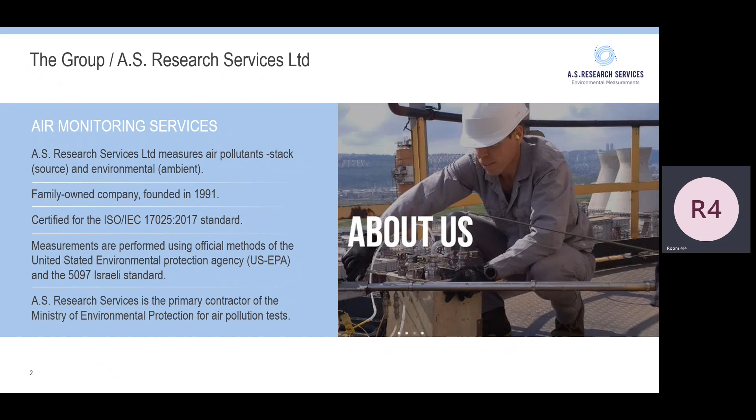And actually, we were the first one. We also run an analytical laboratory from GC mass spec to HPLC and ICPs, and we've got some unique features that you cannot find maybe even in the United States, like we are accredited for aldehydes, silicas, and all those.

But what we're going to talk about is a company named Atmosfir Optics. In 2009, we were the first ones to go into a refinery, and we started measuring. We did one week of measurement, and it took us around one month with two PhDs to analyze the data.

It's good, but you cannot do a business that way. There are not too many PhDs who know how to do the analysis. So then we wrote the method to automate the analysis.

So we are not a manufacturer of equipment. We work with different manufacturers' equipment, some of them here, some in Germany, some all over the world. So we are agnostic. We are actually a data and software research integration company. We provide advanced air monitoring worldwide based on a SaaS business model.

Actually, I'm quite lucky. Some of my scientists actually wrote the method and invented the instrumentation back in the 90s. If you heard the name Robert Kagann, he's still working with us.

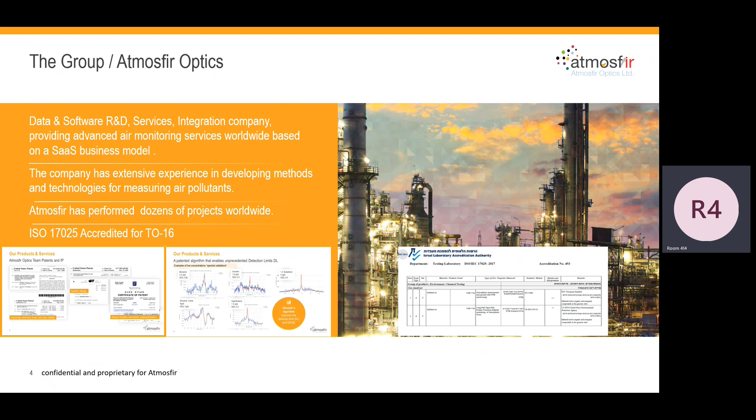So we heard a little bit about Rule 1180 that says you need to integrate FTIR, UV DOAS, but we can also integrate tunable diode lasers for other reasons, point monitors that start from PIDs, electrochemical cells, and up to GC mass spec. We run the raw data through our software, enhance the quality assurance, and give you better, easier to understand results.

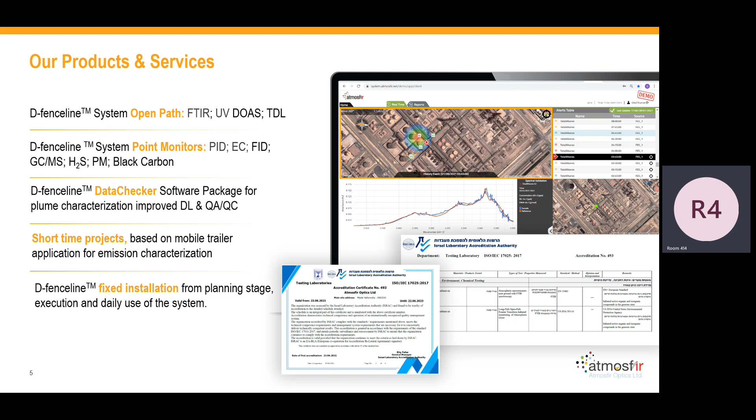So I'm not ChatGPT, so I will not give you the very good answer for why we need the Fenceline monitoring, but in the end of my presentation, I will use it.

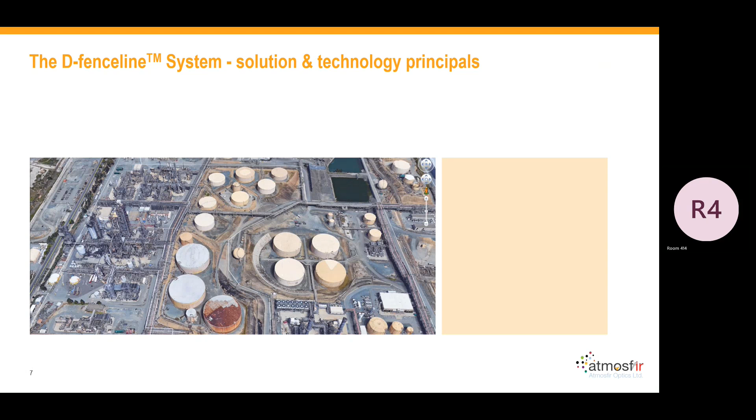When we ask people where the emission coming from the petrochemical industry, if you were in the 70s you would say out of the chimneys because you saw a lot of chimneys with black smoke. But today we know actually most of the emissions go out of tanks, farm, product terminal, equipment, human errors, cooling tower, evaporation pool, heat exchangers. And what's unique about all of those is that we are not measuring them 24/7. So if you got a problem, we have to wait if it's in the LDAR program, and most of them are not.

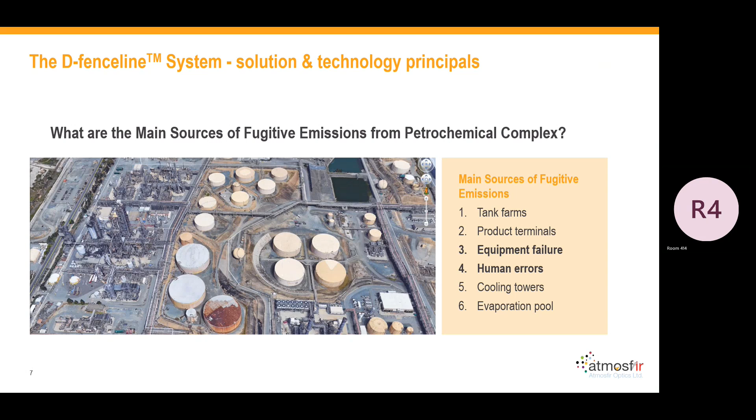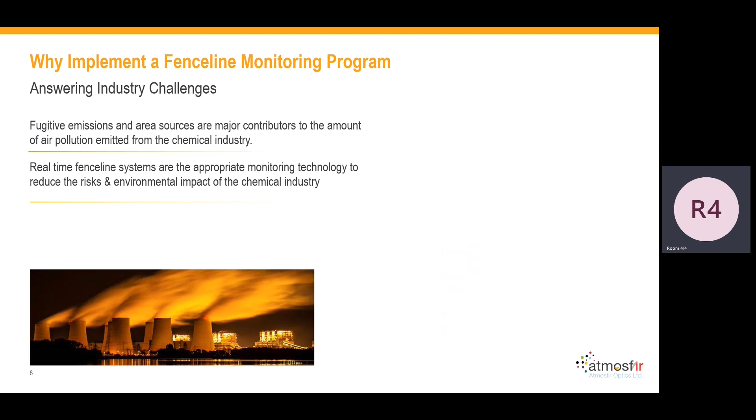In other words, fugitive emission area sources are the major contributor to the amount of air pollution emitted from the chemical industry. Real-time Fenceline systems are the appropriate monitoring technology to reduce the risk to the environment from the impact of the chemical industry.

Everybody heard about the Philadelphia refinery that exploded. If you look at the data of the passive sorbent tube that was there before the explosion, there were high concentrations of benzene. Now imagine that we have an analyzer that alerts not just on benzene, but on total alkane, which is usually 100 times more than benzene, and it will alert you to high concentration coming from that area. So you fix the problem, and maybe you can eliminate the risk of explosion.

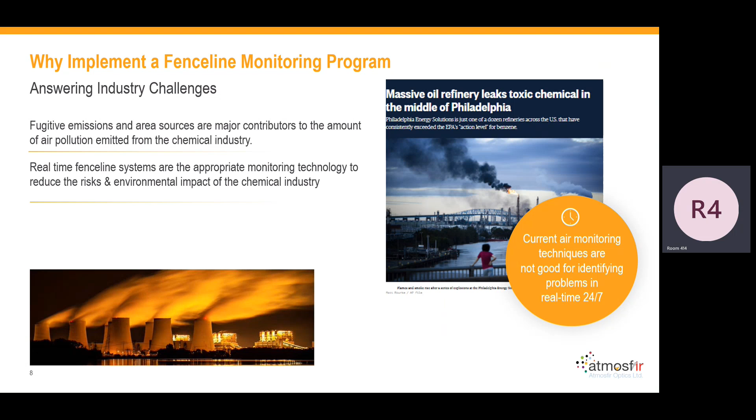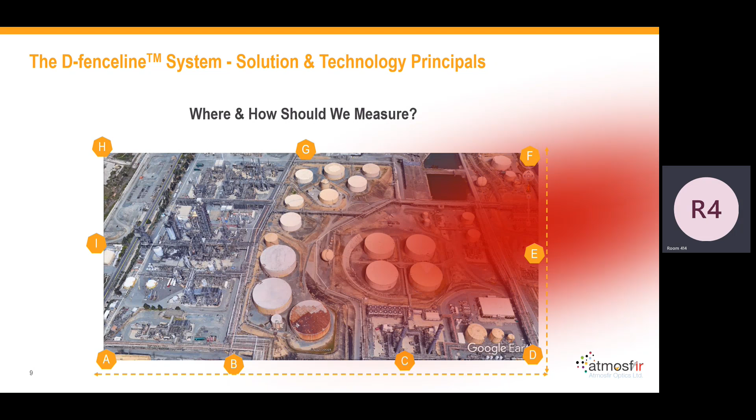What happens? The air pollution moves with the wind. So if there is emission going out, we will not sense anything in point H, I, A, B, or G. And if we sense it on point E, it will not represent our emission because it gives us higher results.

The actual result that will represent our emission, the average, is good for the industry, maybe more representative, because it will dilute the emission as a line and give it more representativeness. So the concentration here can be 1,000 ppb, but on average it could be 100 ppb. But the 100 ppb is more representative than the 1,000 because 1,000 is just one point.

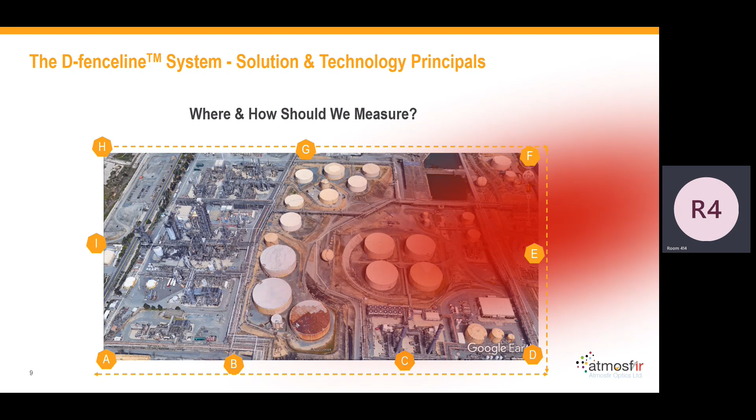Open path measurement along the Fenceline dramatically improves the ability to represent emission when measurements are near the source.

If we are measuring in chimneys, we've got our method, we've got our CEMS. If we go to measuring the city, we've got our ambient air monitors. But if you want to measure on the fence line, the most appropriate technology, if it exists, is to do it with open path.

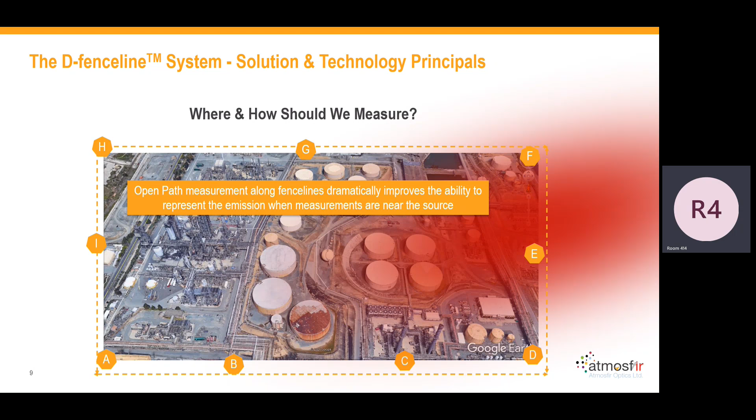Because equipment failure and human errors cannot be predicted in time or space, continuous 24/7 spatial monitoring system is required. We don't know where it's going to come, but we need to know when it's going to come.

If you want to measure our annual emission, if we want to reduce our annual emission, the way is to find the problem faster and fix it.

As a rule of thumb, if we monitor our facility without adding extra money, we find the problem at day one that it starts, we can save 99 days until the LDAR comes and finds it.

So every day equals 1% reduction of emission. We don't build huge scrubbers, we don't build huge things. We just prioritize our LDAR job based on our fence line monitoring.

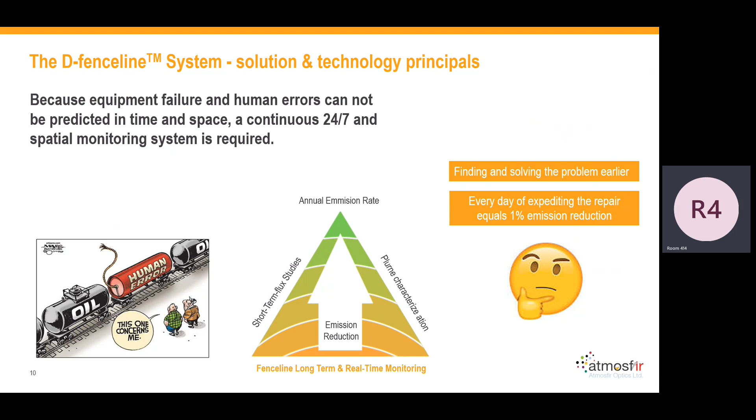So if you have a fence line monitoring system, try to correlate it with your LDAR project, and then you will have another benefit.

So the first program that started dealing with fugitive emission was the LDAR program. And that says that you need to go and sniff every piece of equipment that you can reach, and do it once a year, once a quarter, depending on the regulatory requirements, and fix it within 2 weeks' time.

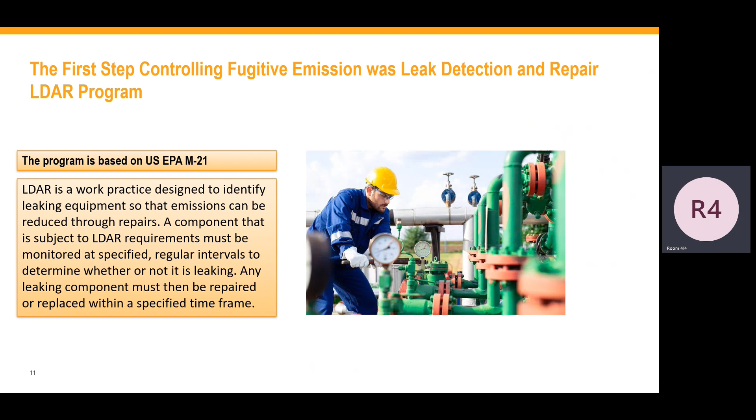First, they start doing it with soap, and then they start doing it with sniffers, and now everybody is talking about OGI cameras or point monitoring. What I'm talking about is a holistic approach where you have fence line monitoring together with real-time point monitors in your facility. That's the way to find the problem.

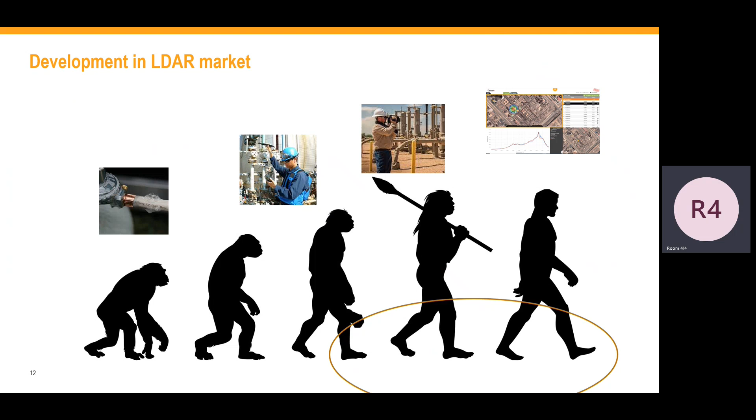In 2015, the federal government accepted the benzene rule that says every refinery must measure benzene on the fence line. I got a lot to say about this rule, if it really protects the public or not. I will let the EIP, Environmental Integrity Project, say what they have to say about it.

But the results are like that: in 2020, 13 refineries were exceeding the benzene rule, and 7 out of those 13 refineries did it 2 years in a row, meaning 2019 and 2020 they were still exceeding. Why didn't they fix the problem?

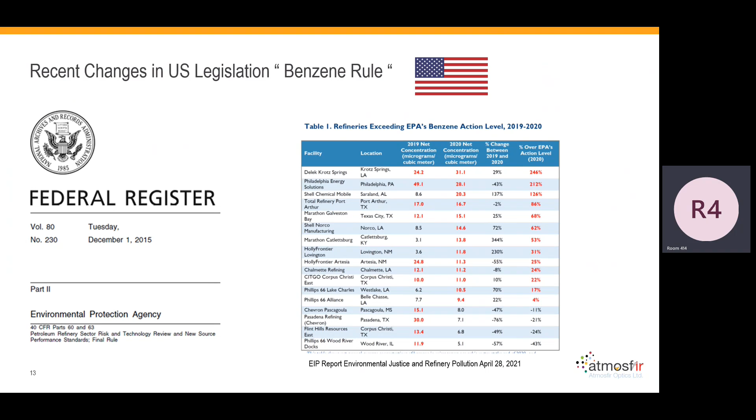So talking about delta, it's not good for the public. We want our technology to definitely be better than that.

Short-term benzene concentration may threaten public health, and they are true. If you do a 2 week average with the passive sorbent tube, you can have peaks of 10 ppm, and it won't be noticed because you average for 2 weeks. This can be problematic also for the refinery and for the public, and you must know it before.

And people start asking, why just benzene? Benzene is maybe less than 1% of what's going out of the refinery. It's not even the most dangerous compound in the refinery. So why did everybody focus on benzene? Everybody was speaking about benzene, but there are other compounds like formaldehyde and acrolein that are in the same danger category.

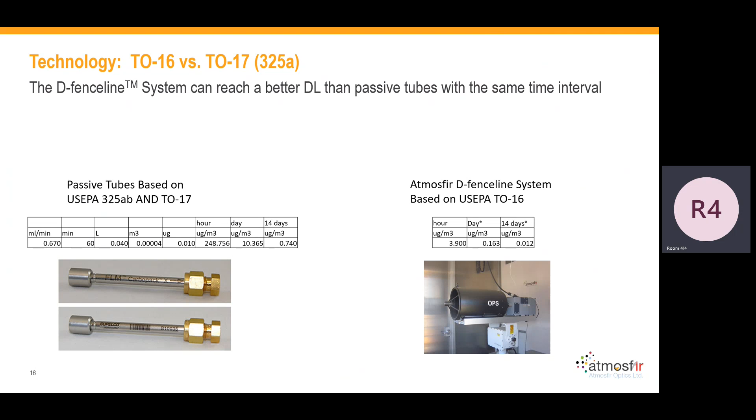I would recommend doing them both. Not because I'm doing the passive sorbent tube, but because it's hard for you to miss the concentration or miss the pressure. So a little comparison between point measurement and line measurement.

Probability to detect the pollutant: if you are using point measurement, the pollution must go directly to your point, so it's low. If you are using line measurement, it's high.

Expected concentration upon measurement: with point measurement it would usually be much higher than the line, because the line will dilute it. As a representative of the factory emissions, point is poor and line is better. And sampling interferences, you get a lot of interferences, but if you know how to run your instrumentation, you can see all the interferences and subtract them.

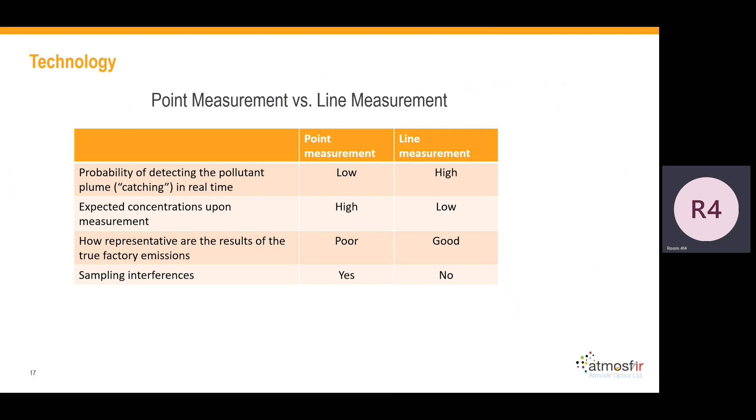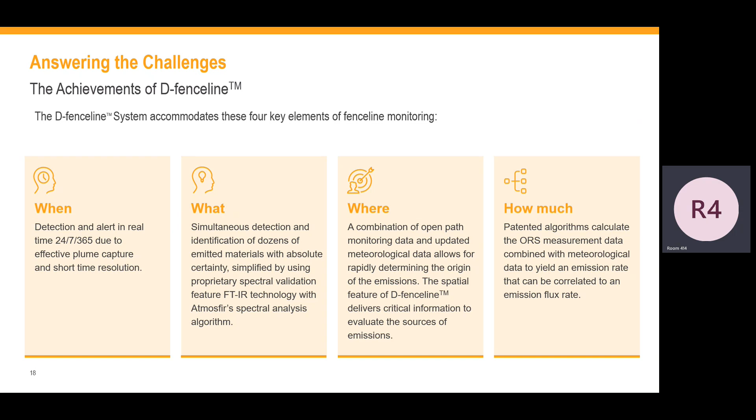But when you do a point measurement, we created what we call the D-fenceline system that monitors 24/7, telling you when emission starts, what the emission is, not just benzene but all the compounds, and also on a real-time basis where it's coming from, and also quantification of how much. It's your need. Let me show you a little bit how it looks.

So here we've got an open path FTIR. It could also be UV DOAS. We shine a beam of infrared light if it's FTIR. If it's UV DOAS, we shine a beam of UV into a retroreflector. The energy bends back. In the way it reacts with the molecule, each molecule absorbs light in a different region, and then we use the Beer-Lambert law to give concentration.

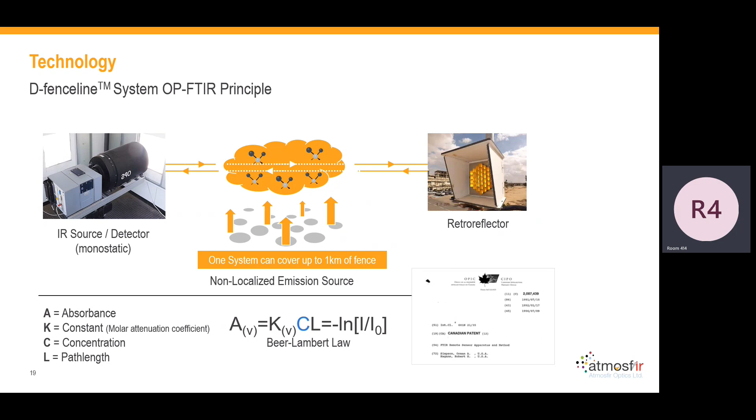And this configuration is called monostatic configuration, again a patent of Robert.

Problems start because we can measure all the compounds with one instrument. Because we can do it, if you don't do it correctly, then you will have a lot of false positives and false negatives. If you don't take all the interferences into account, you'll have a lot of false positives and false negatives. And if you don't know how to do the analysis correctly, you'll have that problem. So you must know how to do it.

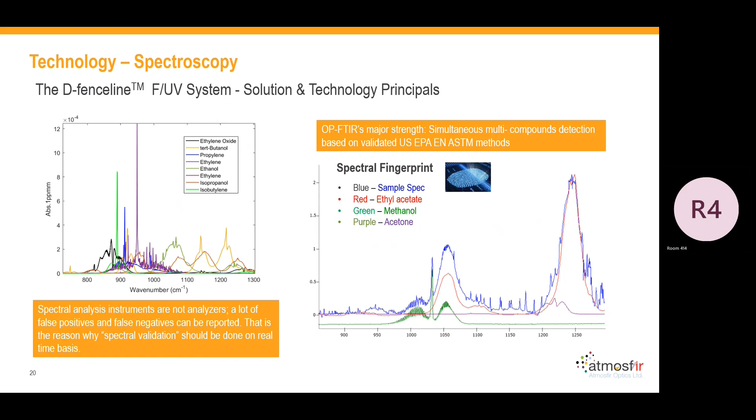As far as I know, for every number that we report, our client can click on the number and it will open the spectral validation. Red is the reference spectrum from NIST, blue is what we're measuring in the field, and now you can be positive that what we reported is true.

Sometimes people claim that we don't show what we do. So actually, we're the only one that gives our client the ground truth against NIST.

And this is actually, if we compare something to NIST, it's called calibration. So each measurement is a calibration. You don't need to calibrate it, because each time we compare our spectrum against this reference spectrum. So if you compare something against this, that's called calibration, so you don't need to calibrate it. You can do a verification, but not calibration.

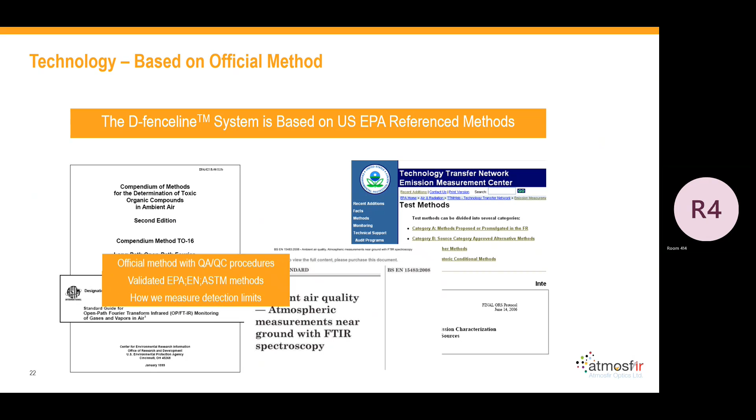I love the FTIR because you've got written methods. You've got US EPA Method TO-16 that allows you to measure any gases in the atmosphere using this method. You've got ASTM, and EN, you've got QA/QC procedures.

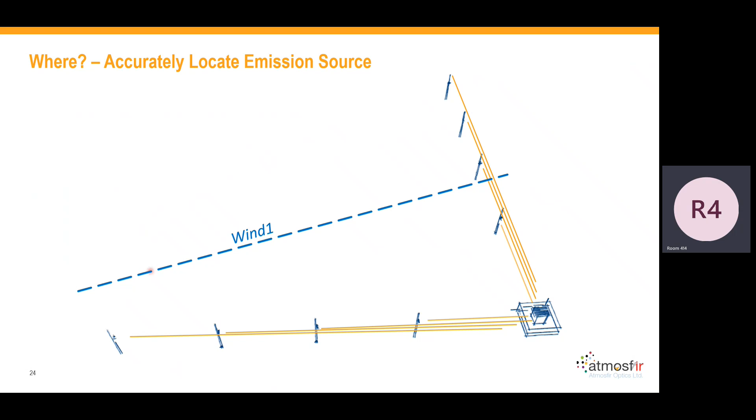How we do the source location, same as the previous presentation, but we do it on a real-time basis. We correlate with the wind, find high concentration on that segment of the fence line. As the wind changes a little bit, we find high concentration on a different segment. That gives you the origin.

So it's not that easy because you've got multiple sources. You need to know how to separate them, and it won't be so accurate the first time. But imagine we've got thousands of those points, and now we can run a statistical algorithm to see where the origin is.

For sure, we can tell you if it's coming from your facility, from the Dominguez Channel, or from a sulfur plant nearby, and we can do it on a real-time basis.

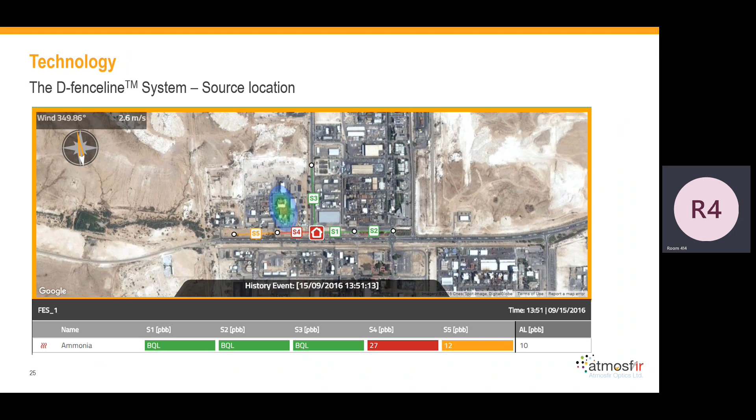And because we want it to be easy to understand and digest, and we know the operators are not PhDs and we want them to run it, we have this screen for our client, not for the public. The brighter the color, the higher the possibility that the leak is coming from that facility. And now you can send your other team with the sniffer, the OGI camera, the ultrasonic, whatever you want, and they will fix it.

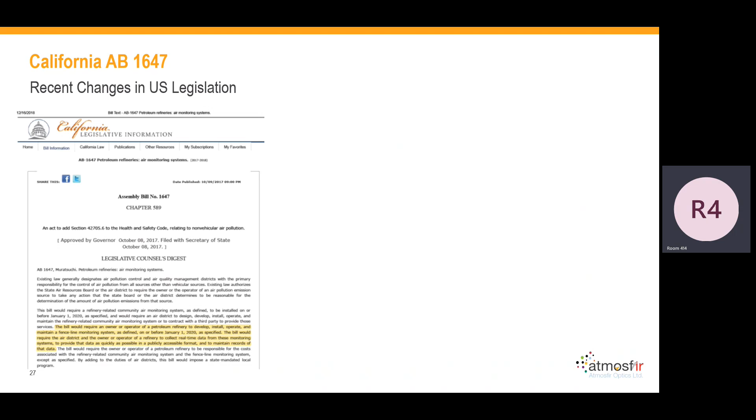So California in 2017 wrote Assembly Bill 1647, and it says every refinery must measure the pollutants on the fence line and report to the public on a real-time basis, no later than 10 minutes. Every refinery — that was the rule.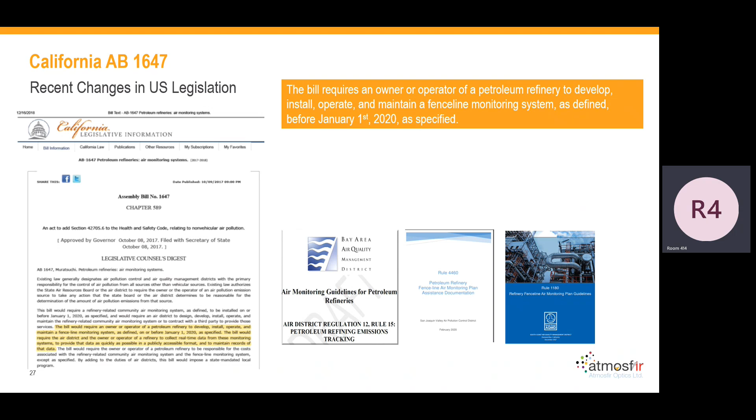They decided that small refineries don't need to measure. What's a small refinery? They decided 40,000 barrels per day. Why? That's what they decided. Each refinery and each set of guidelines gives a different list of compounds that they want to measure, and different time resolution, different quality assurance — a lot of fun.

All of a sudden, from a $0 market, and I'm very modest, we created a market of about $50 million with all those installations, with recurring revenue of around $15 million. Just by the rule, the industry did a very good job, no complaints, everybody did it on time, and if there is regulation, everybody obeys.

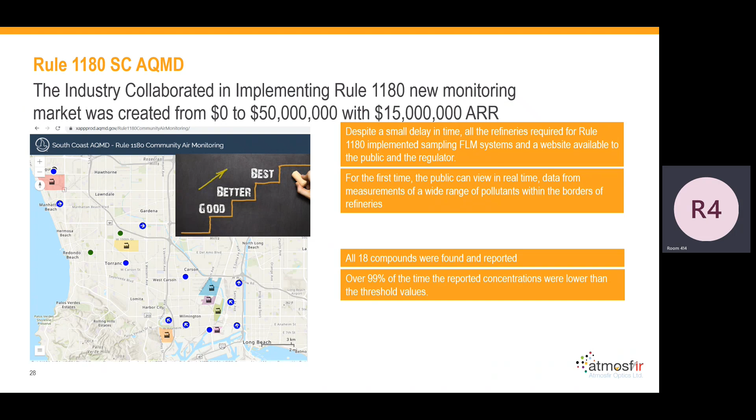That really did it. All the compounds were found, and what we found out in California, and I can tell you this is not the situation if you go to Canada, I'm not sure if it's the situation here in Texas, but more than 99% of the time, as you saw, everything is below the threshold. Sometimes we've got exceedances. Most of the time it's not related to the refinery. Sometimes it's related and they fix it.

But we report millions of data points to the public. How do we know that it's true or not? I cannot put our PhDs, or not spectrum PhD, to analyze each one of the data. We must have software that will do it automatically. Otherwise, we will report bullshit to the public. That's why.

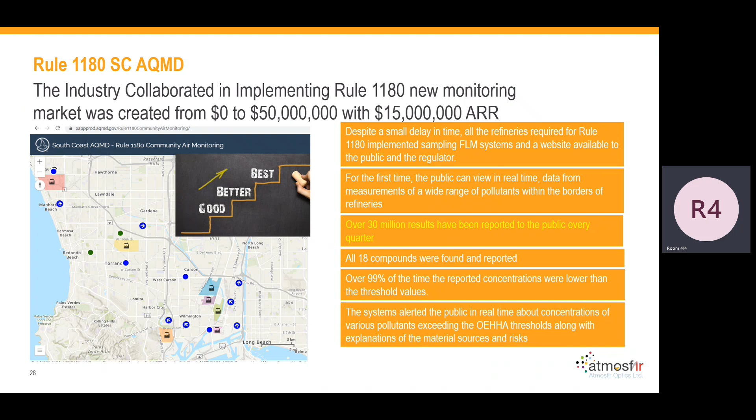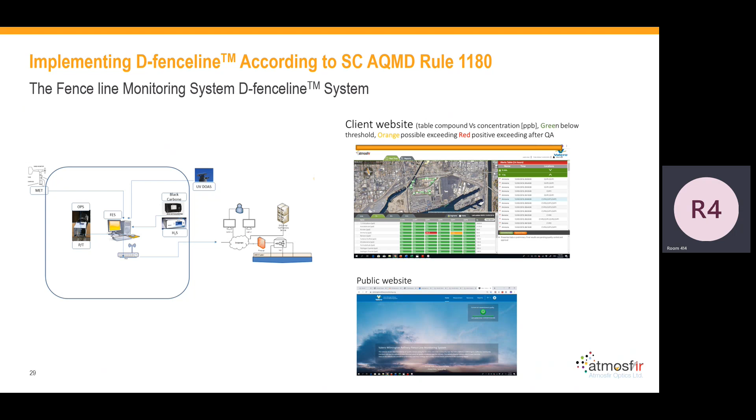So for our client, we've got a website for yourself that has all the bells and whistles: source location, spectral validation, a lot of other features. And for the public, you got something that says green, it's everything, it's okay. And how this installation looks like. Maybe if you will have time later on, I will show you if you got that question.

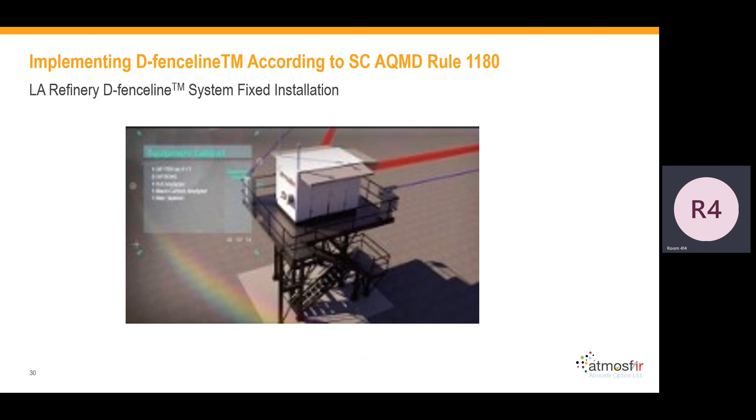So this is the list of compounds, and this is our detection limit. These are the thresholds by the Environmental Protection Agency of California or something like that. And this is the MDL from all the refineries from the quarterly reports, for the South Coast I think, or from all of them. And so you see quite a difference. Let's say 1,3-butadiene, we report around 0.3 ppb, and one can report 9 ppb.

But if you go to acrolein, then it's very dangerous - a rarely found compound because they don't manufacture it, it's a side product maybe, and the threshold is 1.1. So we can measure it at 0.3, but some of the other refineries claim that the detection limit is 30 ppb. The threshold is 1.1, and the detection limit is 30 ppb. Unrealistic, and it's gone like that for at least 3 years now.

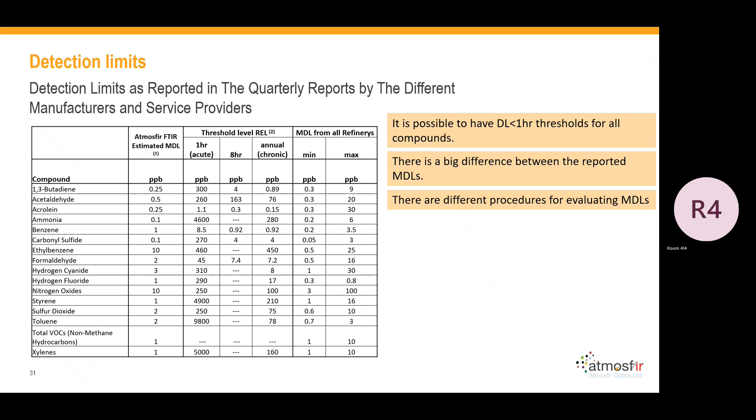But what we can see in this table is that the compound can be measured below the threshold. So if it can be done, everybody should do it. There's a big difference between the reported MDL. Each one of us do it in a slightly different way. Some of them do it empirically, some do it by measurement, some of them stop the measurement and do it once a quarter, some of them measure routinely. There's no distinguished rule how to do it.

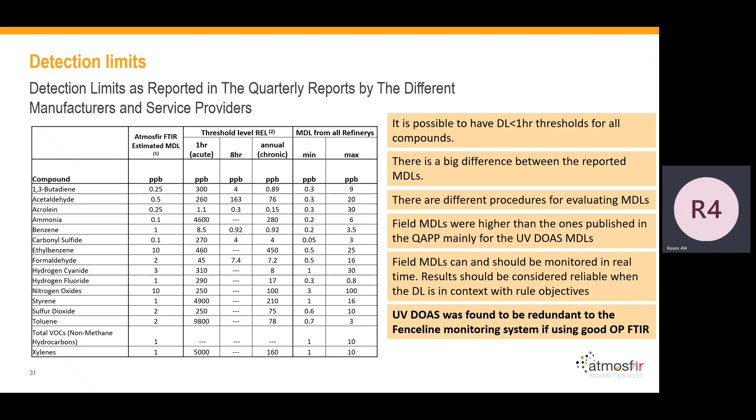Actually, field MDLs, and also our field MDLs, were higher than what we thought in the beginning. And what we found out in our installation is that UV DOAS didn't give a better detection limit for benzene. Yeah, the signal is much stronger, but the noise is also. This is from our installation, and we used for that installation Swedish UV DOAS, called OPSIS, accredited, got TÜV approval, all the approval, whatever. And if you get the report, they should be at 0.2 ppb detection limit, but this is the actual measurement that we found.

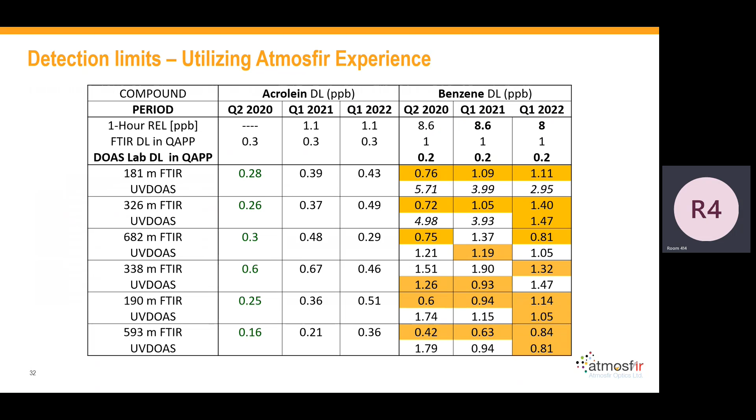There are times it's 2, sometimes 5 ppb, and they got TÜV approval of 0.2. So if I took the instrument and put it in the laboratory on an optical bench, it will give me 0.2. But out in the field, when you've got oxygen and ozone, then it started to change. And if you look at all over the data, with all the passes, you can definitely see that most of the time FTIR got better results, real-time results. So you don't need to have a UV DOAS, an FTIR, or a good FTIR - I will not tell where it is, but there's a lot of others.

So we're talking about acrolein. If you get to read the quarterly report of that refinery, it says that his detection limit is 4. If you go into his website, then you get this, 0.6. Same refinery reports on a real-time basis, an order of magnitude different than what he reported in the quarterly reports, and there's a lot of problems going on.

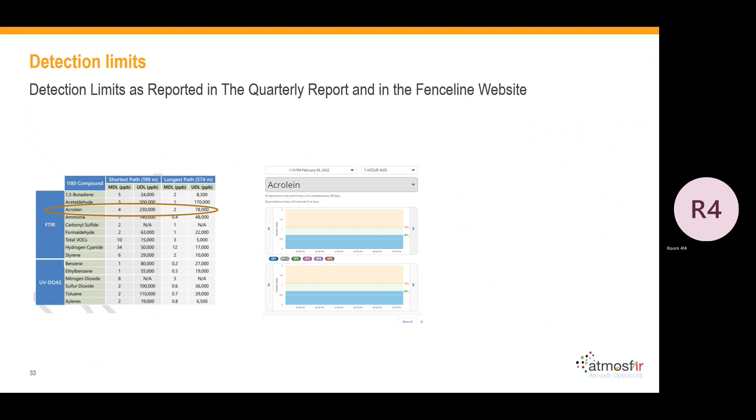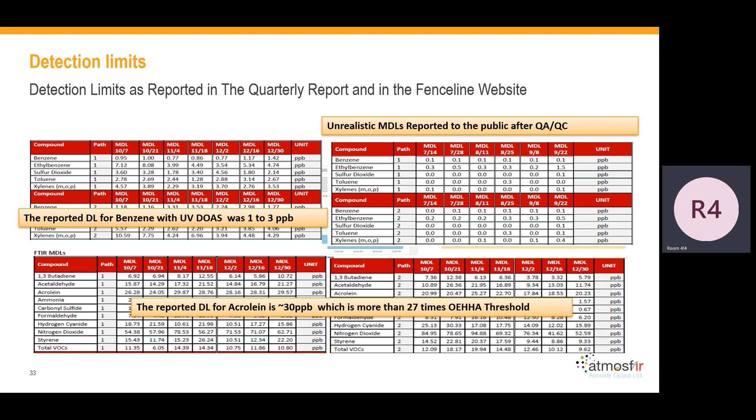Then different site, then acrolein, 30 ppb benzene with UV DOAS 1.5, and sometimes they give results of 0 detection limit. A lot of problems with the quality assurance.

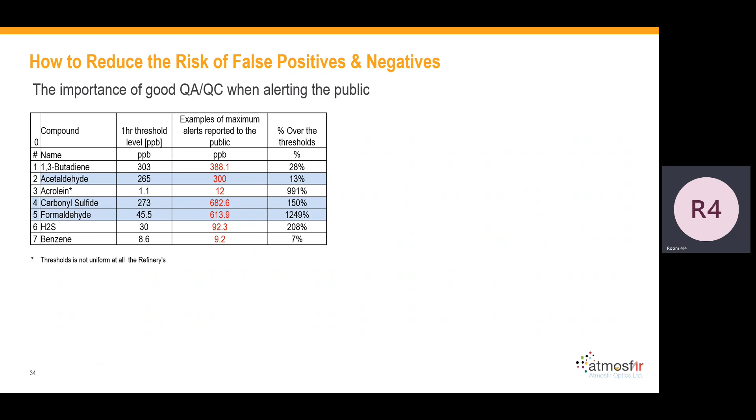In the beginning, there were a lot of alerts, not with Spectrum, but other refineries gave a lot of alerts, and they were false positives. For example, concentrations of 300 ppb of acetaldehyde or 600 ppb of formaldehyde - you never see those concentrations on planet Earth, not in China, not in LA in the 50s. So they didn't do the analysis correctly, and the quality assurance was bad because they don't have spectral validation, and they reported that to the public.

Actually, 3 years later, they're still on the quarterly report with those incorrect concentrations. For sure, it's bad for the company, it's a risk of litigation, and you find problems that do not exist.

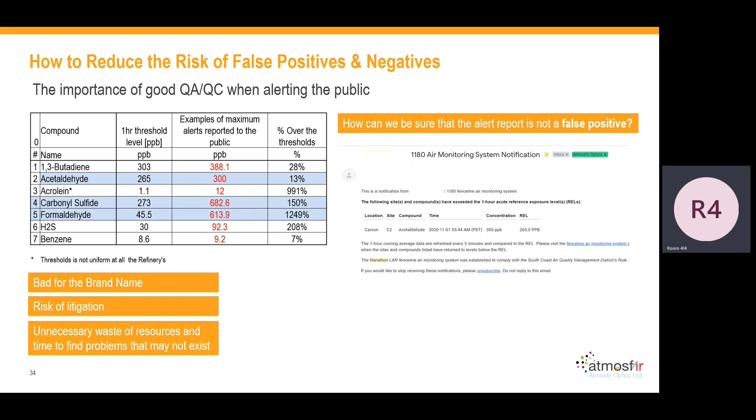Buying the instrument itself is not enough. You must have a person or software that knows how to do the analysis correctly. And as I said, each number that we report gives spectral validation.

We talk about the Dominguez Channel. In the beginning, there was no Dominguez Channel data, but the first day we started operation, we had the threshold exceeding for H2S. I looked at the wind and it was coming from the north, so I could tell my client that it's not his refinery.

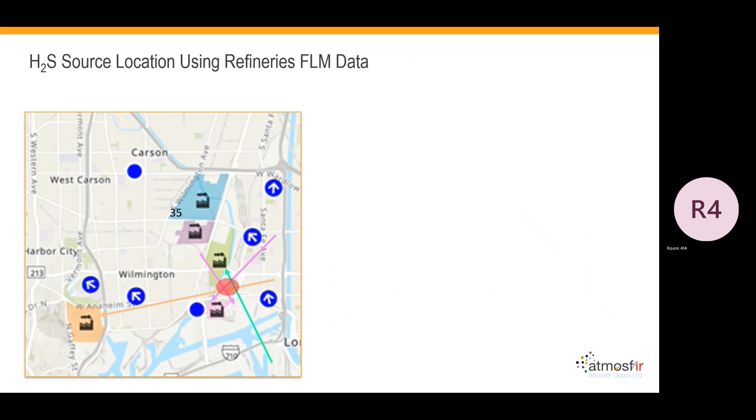And then I decided to do back triangulation from all the refineries. What I found out is that if I take all the data from all the refineries, I can say that the source is somewhere in between. Then I opened Google Maps and saw yellow - yellow is sulfur. Meaning that if we wouldn't have this technology, everybody would blame the refineries, while there is a sulfur plant in the middle that gives the high concentration of H2S.

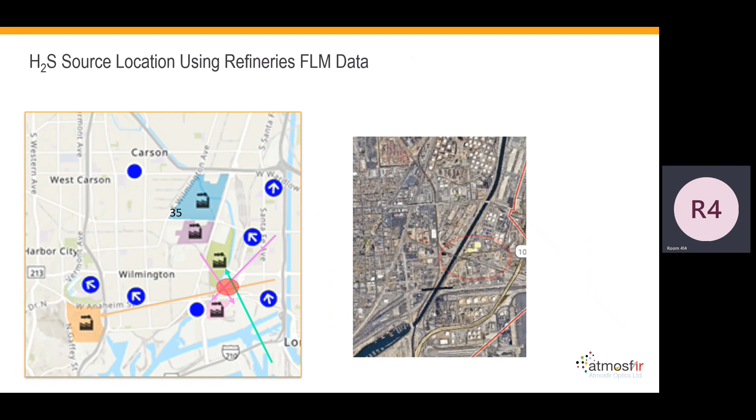Most of the VOC emissions from the refinery are alkanes - not benzene, not BTEX, not formaldehyde. They're alkanes, like hexane, butane, and things like that, and not benzene. So saying that benzene is a tracer for VOC emissions from refineries is misleading people. It's less than 1% of the emissions. Yes, it's a dangerous compound, but it's not the main one. And if you want to find your leaks, if you want to improve your facility, go measure your alkanes - that's easier and more representative.

Benzene is rarely found. In the last 3 years, we found one occasion of benzene. I think most refineries maybe had 1 or 2 occasions, not more. We're talking about 1,000 days of measurement, so less than a promille of the time. This is California.

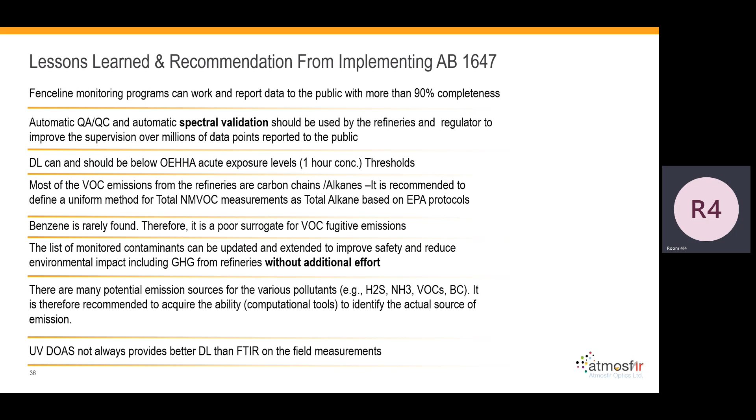Lesson learned: one website. We said to South Coast that you should have one website that takes all the data, gives the quality assurance, and fuses the data from all the refineries to give you good data.

8 sites, programs - and what we said is that the program should extend to terminals, a few terminals, and other chemical complexes. Everybody targets refineries, but actually there are more dangerous chemical plants or petrochemical plants that manufacture ethylene oxide and things like that. All the product goes through terminals, and no one checks those terminals. So we should do that as well. But refineries are easy targets, so we started with them.

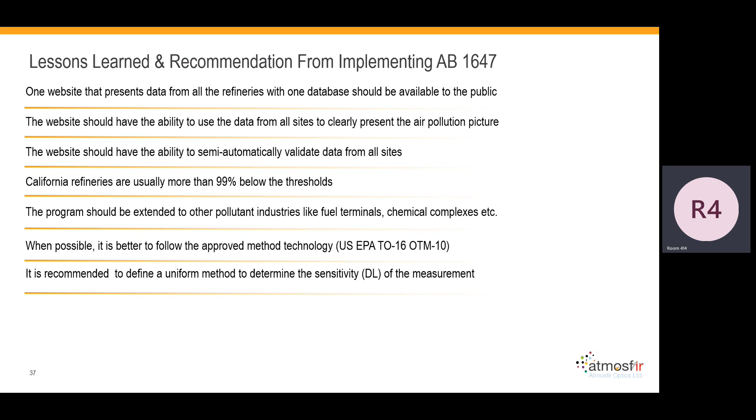When it's possible, we recommend following USEPA method, and for FTIR we have a USEPA method. There should be specific instructions on how to measure or determine the detection limit.

South Coast understood that there was a problem, and they issued an RFP - request for proposal - to audit the Fenceline program. They had a good budget for it, I think $1 or $2 million for auditing - quite a good budget. A lot of people tried to go for it, and it started in May, with the selection supposed to be decided in August 2022. But until today, no one has been chosen. So we've got the budget, we've got people who want to do the job, but I don't know what's happening there.

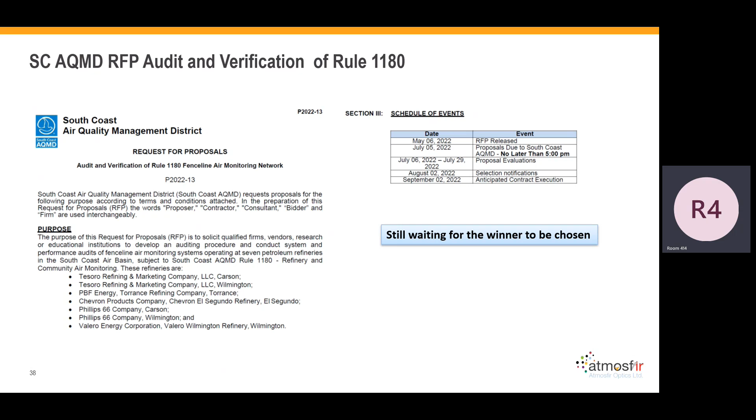Next week in California, we'll push it. Did you know something about it, or nothing?

Huh? You don't want to do that audit? They say I've got a conflict of interest. Yeah, but if you let me do it, maybe they will. How about we audit everybody else, but I'll audit you and you audit. That's good, that's what we actually do.

So Colorado joined the party, and they heard something about Fenceline monitoring, and decided to do Fenceline monitoring. But they wrote a stupid regulation. They said you must measure just benzene, H2S, and HF, and you should measure refineries, but also terminals, and also coating industries.

If I don't even have H2S at the terminal, why should I measure it? And if I don't have HF in my terminal, why should I measure it? And in my coating facility, if I don't have benzene, why should I measure it? And why just measure benzene in the refinery when benzene is less than 1%, and we've got more than 20 other compounds that we should measure?

So the green people raised their hand and said this is stupid, we want you to measure everything, and it won't cost the refinery more, so let's measure it. So the government decided to add compounds. Then the industry went back and said you cannot change our program now. So everything is in court, and last I heard, it hadn't started. There's still negotiation going on.

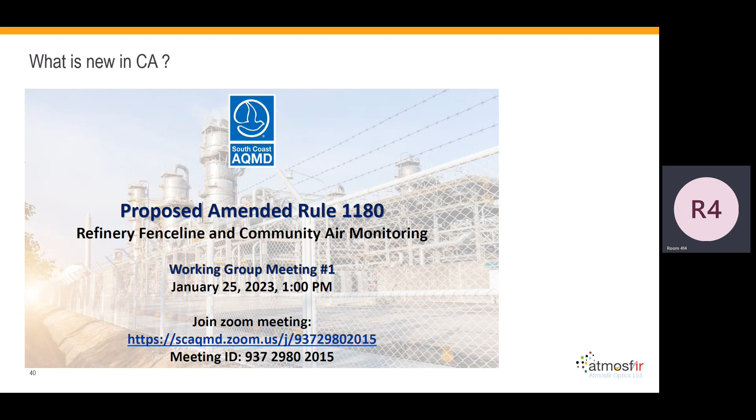Just from end of January this year, there was a public meeting at the South Coast, and they said the green people took them to the Supreme Court of California, and also San Joaquin, and also changes in the Bay Area. Eventually the ruling says you, as a district, are not entitled to say what is a refinery. It's not just oil refinery, it could be asphalt refinery, it could be other refineries.

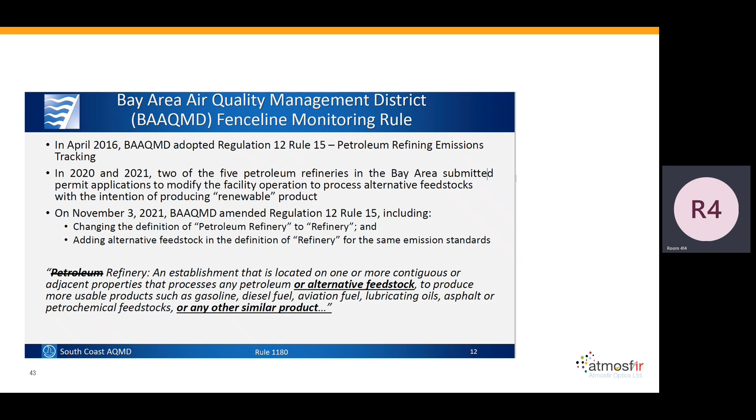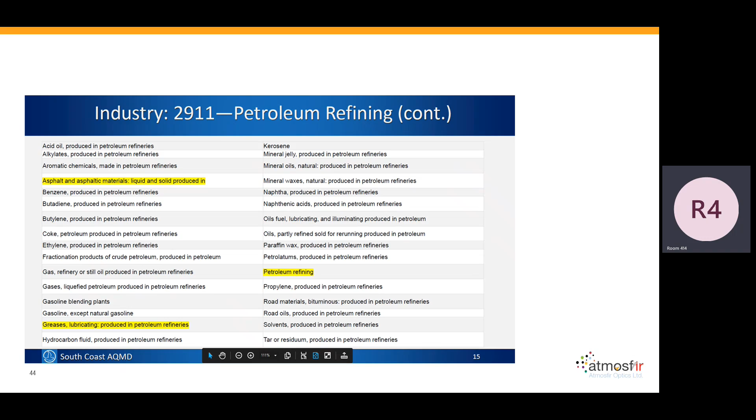You are not entitled to say just measure BTEX. You must measure all that was stated in OEHHA, all the compounds that should be measured. And then all of a sudden, at least for the South Coast, there's petroleum refinery, but also they want to add asphalt, and also lubricated petroleum. So if we started from 7, now they're talking about adding those 7 in the near future.

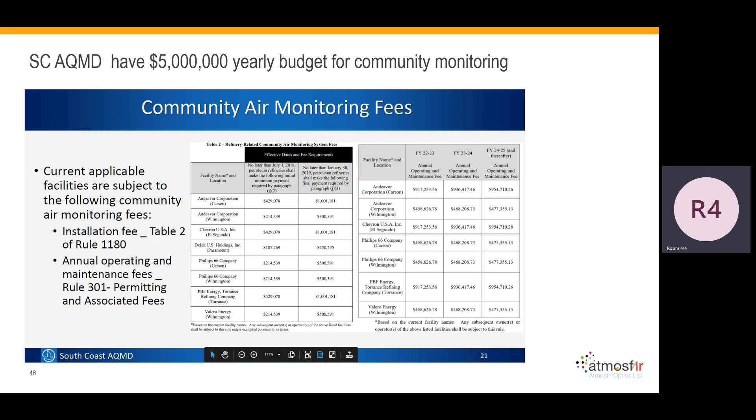Not just that, they're also adding point monitors in the community. They'll get more budget, $5 million per year for monitoring the ambient air over there. And they want to add a list of compounds. I can debate if it's needed or not, but this is what it says. Like adding naphthalene, which we can maybe easily add to our instrumentation, but how can we measure metals like cadmium in real time, and why should we?

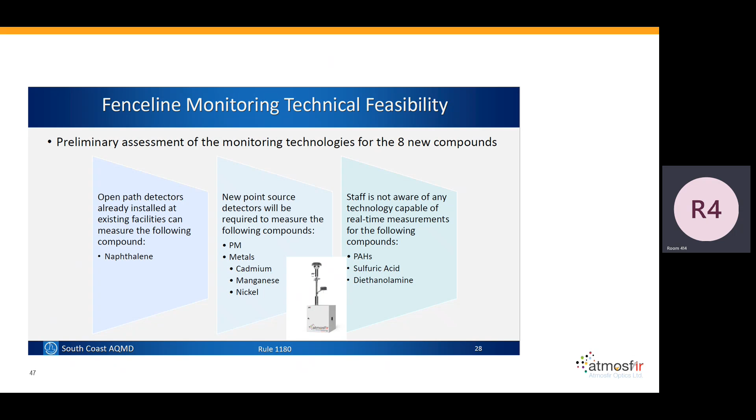And then, we can do it. There's instrumentation that can always do it, but it will cost the industry quite a lot of money. What we do is polyaromatics, sulfuric acid. So there's a lot of debate going on in California, and here also.

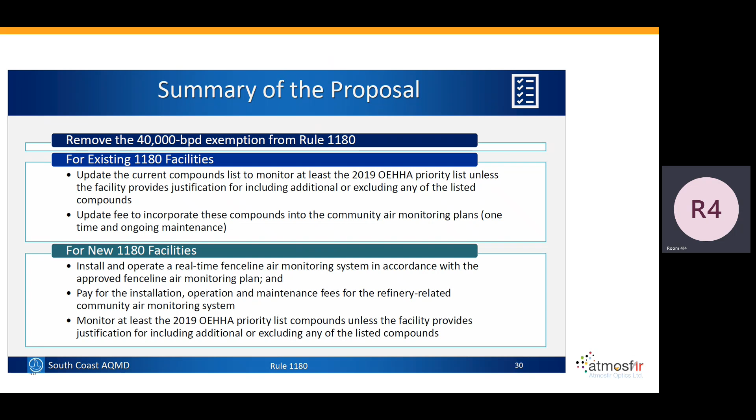So existing refineries will need to add more compounds into their monitoring. We'll need more uniformity in quality assurance and things like that, and eventually will be audited. New facilities will also be added for monitoring. This is in the South Coast, same goes with San Joaquin, and same goes with the Bay Area.

We're talking about a different approach of Fenceline monitoring, and how we can measure greenhouse gases. The difficulty is that methane concentration is around 2 ppm these days. And if you're measuring the emission of methane not very near the source, you're talking about concentrations of 10 to 100 ppb. So how can we say what is the difference between the ambient level and the concentration?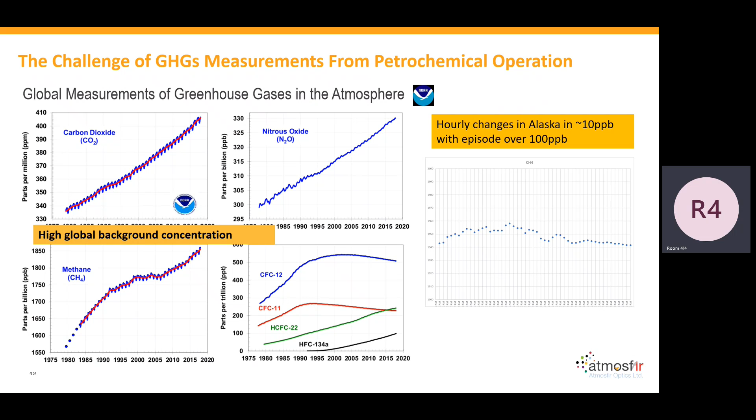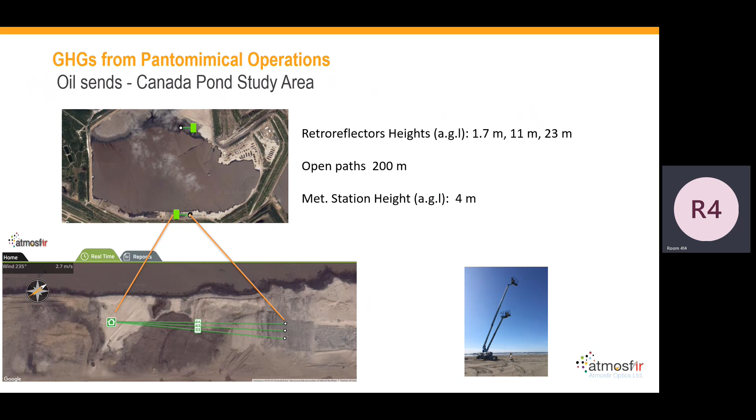There's a way how to do it, and we know how, and we've done it in the oil sands, measuring ponds. Now, how much is the emission of greenhouse gases from a refinery or from the operation? It can be done with Fenceline monitoring.

For the first time, there was repeated concentration monitoring year after year that gives consistent results. Before that, they would measure with floating chambers and similar methods, and every time they got orders of magnitude difference between each year.

So there's a way to do it correctly today. This is a project from 2015 we did for the South Coast. The first time we found a leak, one tank was releasing VOCs on the order of 300 kilograms per hour. Because we found it, we could shut it down and fix the problem in 6 hours, instead of letting that emission continue.

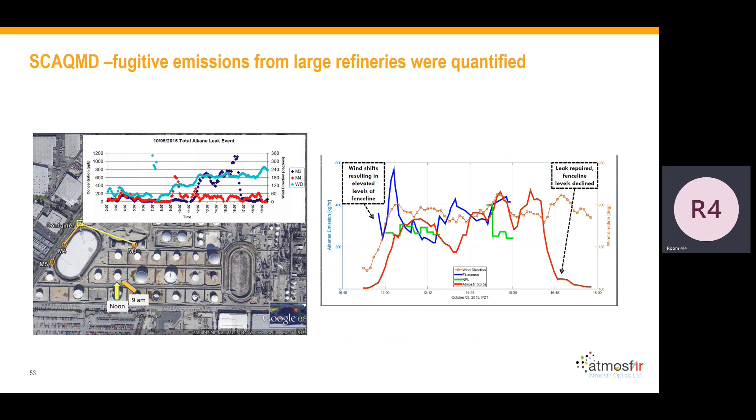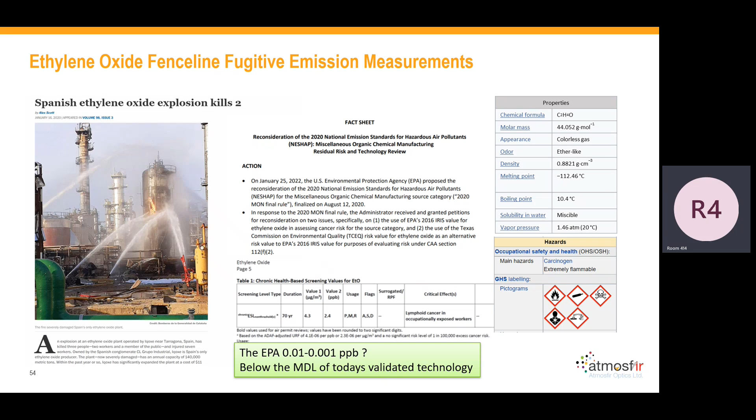Now we're doing a project of fenceline monitoring for ethylene oxide in this area. Ethylene oxide is a very dangerous compound, much more dangerous than benzene, and it's flammable. The EPA says the threshold should be 0.001 ppb. No one can measure that, but we can measure around 1 ppb.

This is from Illinois, and this is another survey. When you are near the source, concentration can be around 10 to 100 ppb of ethylene oxide. There's a lot of money involved in this — the last legislation in the United States gave a penalty of $360 million for emission of ethylene oxide. So keep in mind, if you run an operation, it's better to know what's going on than to go bankrupt.

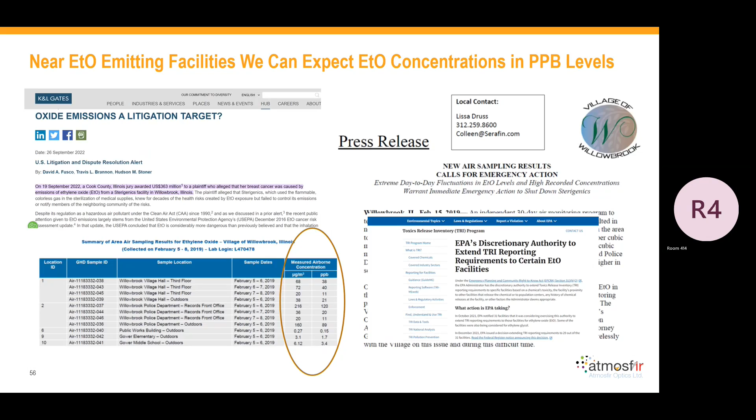Again, ethylene oxide — this is how we are measuring it, in 1 ppb detection units, and as the concentration goes higher we can measure it with better fitting.

Again, ChatGPT — I asked if we can measure PFAS. Everybody's talking about PFAS these days. ChatGPT said yes, you can measure it with Open-Path FTIR. So I asked a bit more about the science, where to look, what bands, etc., and it told me which bands to look at. Then I went and opened my chemistry book and did the simulation. So PFAS can be measured with Open-Path FTIR — it's a different question whether you find it in the ambient air or just in the water, but if it's in the gaseous phase, we can definitely measure it.

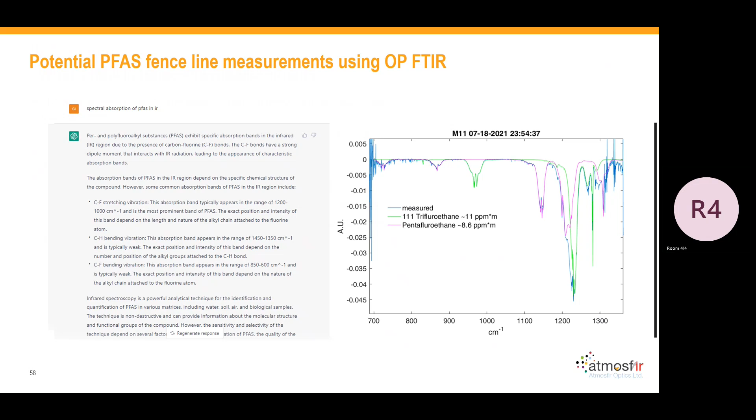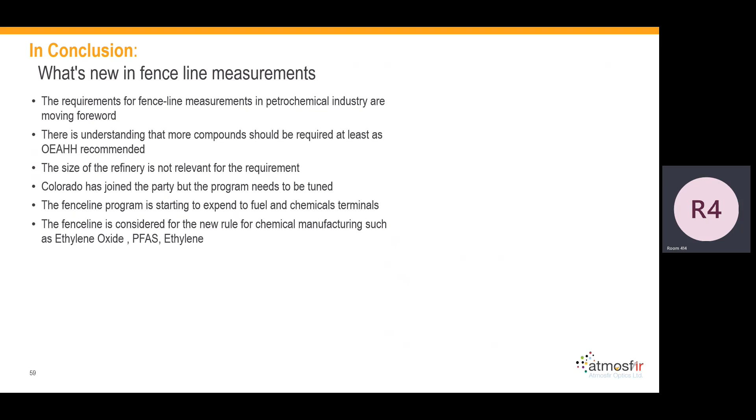So in conclusion, what's new in fenceline measurement? The requirements for fenceline measurement in the petrochemical industry are moving forward — new legislation in California, discussions in Colorado, and I don't know about TCEQ, if they're still considering it. Louisiana is thinking about it too. It's expanding to other chemicals, not just benzene — we're talking about ethylene, ethylene oxide, and other compounds. The size of the refinery isn't relevant to the requirement; a small operation can emit more than a big one. Colorado joined the program, but the program should be tuned — terminals should be monitored along with other compounds.